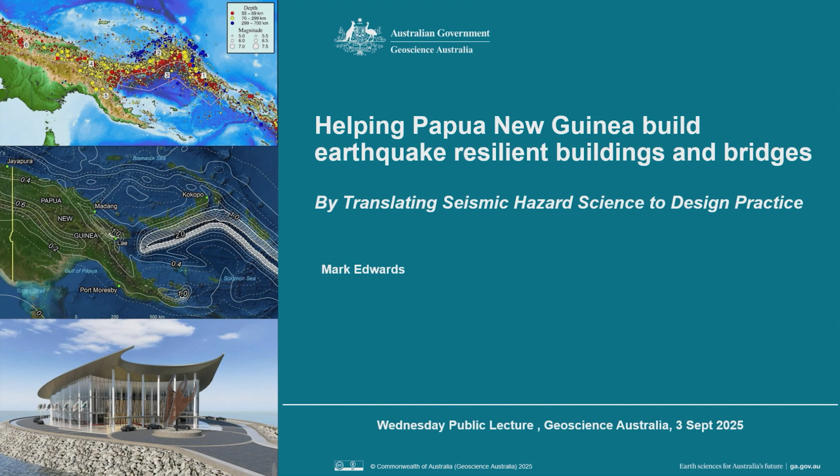Thank you very much, John, for the opportunity to speak today on a program that began in 2018 for our section, captured in the banner on the left-hand side, where we're translating observed earthquakes into a probabilistic understanding of the hazard, and then the last step is actually translating it into regulation for buildings and infrastructure.

When we reflect on the last 12 months, some significant earthquakes have occurred in our region. One, mentioned by John, is the earthquake that occurred in Vanuatu, which had a major impact on Port Vila. 14 people died, 265 injured, with damage to infrastructure and buildings. Some of those buildings were older - the bottom left shows an older structure that collapsed. But the top left is a more modern building which housed 4 diplomatic missions, and you can see that it actually collapsed.

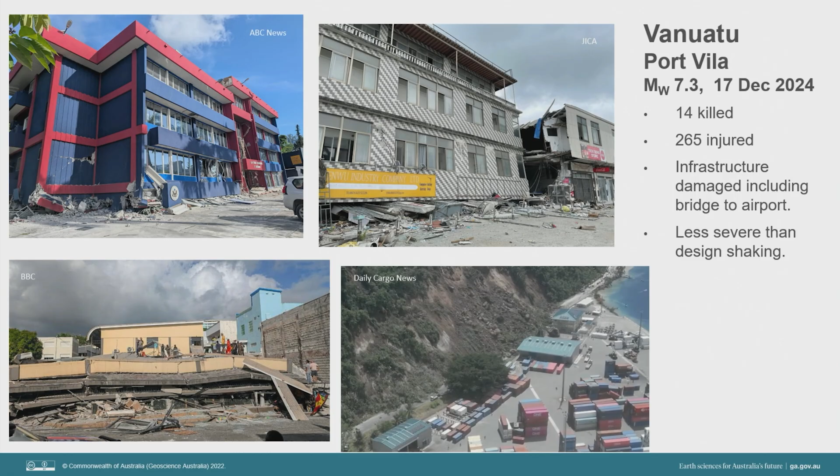Half the building had a soft story collapse, which directly impacted the US Embassy. When it comes to the level of shaking there, that was probably less than design level shaking to their current standard.

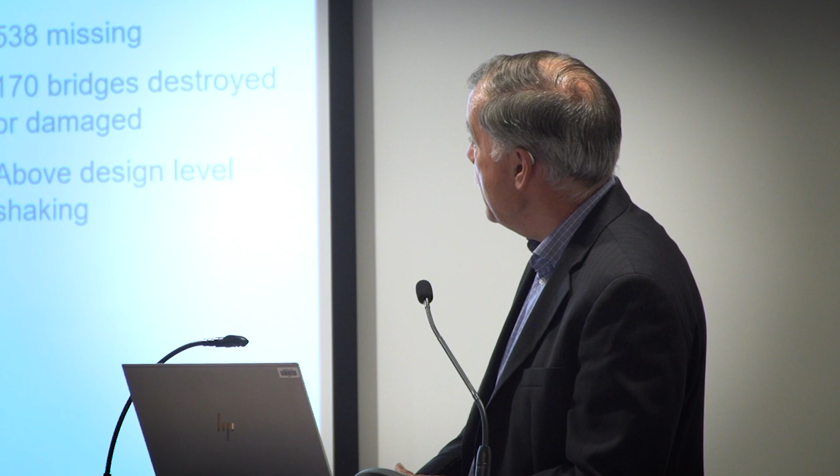More recently, Myanmar - this is the impact on Mandalay. Over 5,000 people killed in Myanmar, 103 killed in Thailand with the collapse of that building, 11,400 injured, and 170 bridges either damaged or destroyed.

In this instance, as best we could estimate, the shaking was above design level if they'd used the latest understanding of hazard in a modern code. When we look at the damage to the buildings, we notice some are quite modern. Looking at the bottom left, we see catastrophic collapse of apartment buildings. At this level of shaking, you would not expect that outcome - you don't want mass loss of life. Looking in the background, other buildings didn't catastrophically collapse like those in the foreground, indicating that not all buildings are created equal.

But it does raise questions when we look at those 2 events in our region. Was the hazard not well understood? Was it not incorporated into the building standards or manuals used for bridge design? What about the legislation - did it call up these standards? Were the building officials able to enforce them? What about the building professionals - were they competent when it comes to seismic design? And what about the tertiary institutions training the next generation of architects and engineers - do they have the resources to educate them?

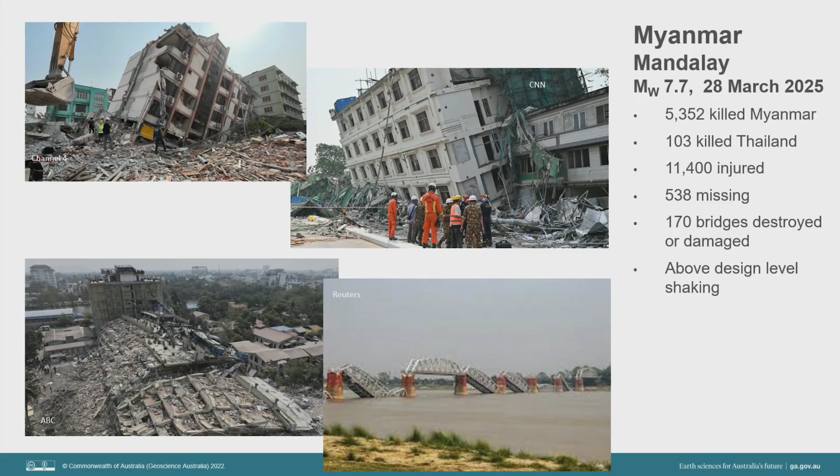In these areas, I'd like to describe a journey we've had in Papua New Guinea that has sought to address that. For those particular countries, it might be that 1 or 2 elements were missing - perhaps most of them were missing - but what we've endeavoured to do here is help them through all aspects of that.

So I'm going to begin by talking about the motivation - a new seismic hazard assessment - then looking at the implications for building regulation, assessing the adequacy of building regulation in light of the new hazard assessment, engaging with stakeholders to assess what they need, developing an interim amendment, and delivering new science to the professionals who will use it. Then, on the legislation side, helping the PNG government revise their legislation to mandate development of a new standard, and how that will be influenced by a new loading standard in New Zealand soon to be published.

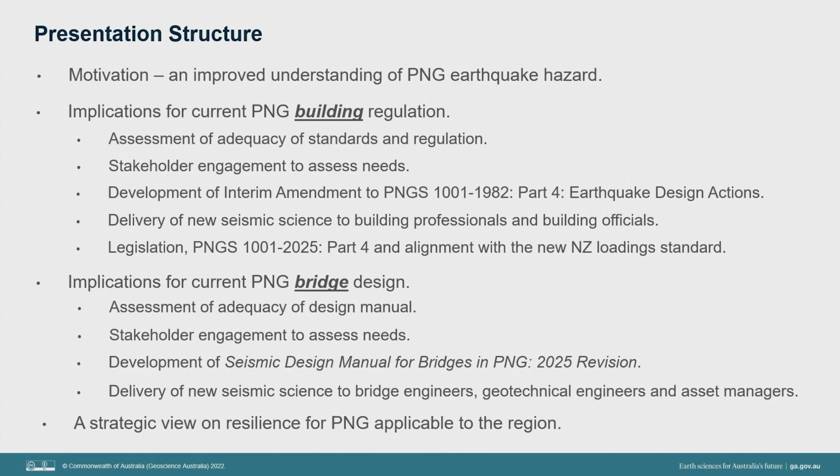Then moving on to bridges - again assessment of the adequacy of bridge design, engaging with stakeholders, developing a new updated manual, and delivering this new seismic science in a form usable by professionals: bridge engineers, geotechnical engineers, and asset managers. Finally, lifting this journey up to a more strategic level as to what it means for PNG when it comes to resilient infrastructure, and also for other nations in our region.

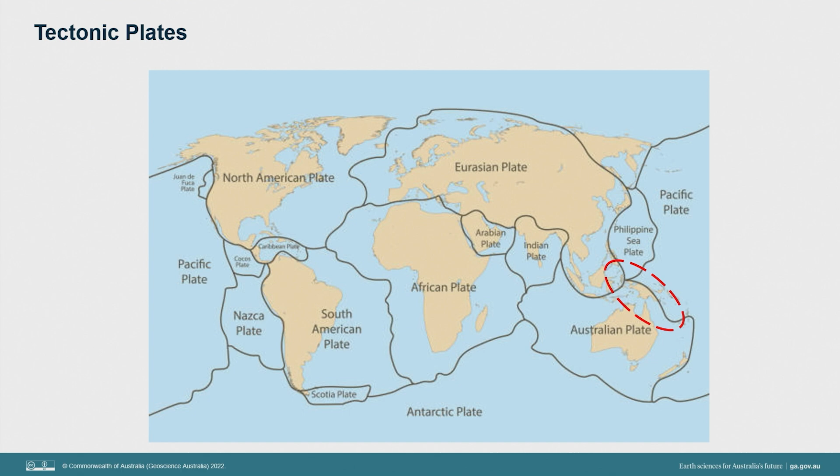So why do we have earthquakes in Papua New Guinea? Well, we all know about tectonic plates, the Earth's crust. These are the primary tectonic plates, and when we look at Papua New Guinea, it's astride the Pacific plate and the Australian plate.

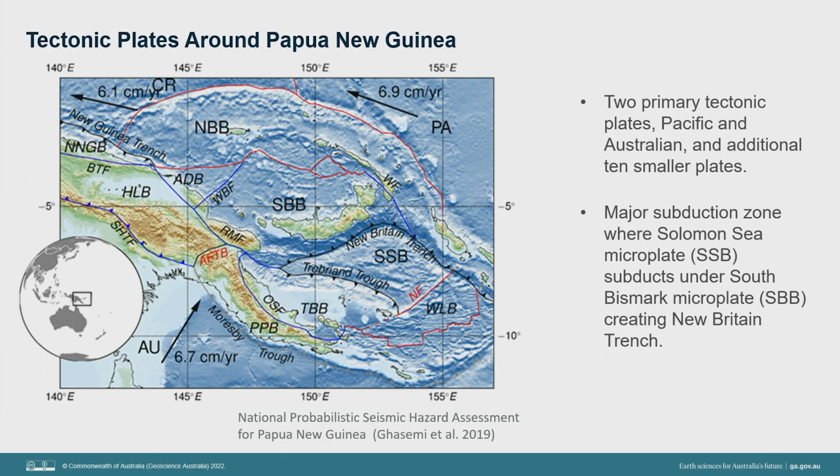But when we look at that plate boundary environment, it's much more complex than that. At the top right we've got the Pacific plate, bottom left the Australian plate. In that region between, there are 10 other plates and microplates being stressed by tectonic movement.

That tectonic movement we can see right here at Geoscience Australia with our GNSS stations, the tuned antenna we have. More recently we can actually observe tectonic movement every year. Looking at the movement observed in Karratha, Western Australia, moving on average at 70 millimetres per year, and here in Canberra, 58 millimetres per year.

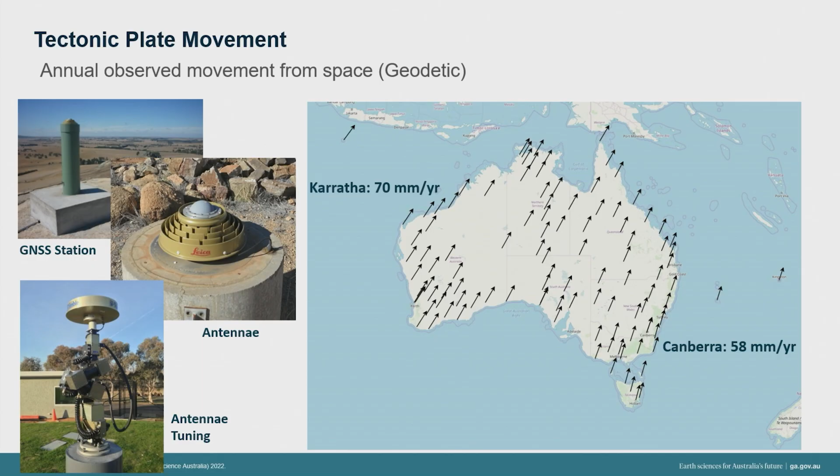But where we're moving into Papua New Guinea, we're into that rather complex plate boundary region, and that causes relative movement between all of these plates and microplates. This is work by Richard Stanaway, who has been doing geodetic work looking at the movement of monuments in PNG.

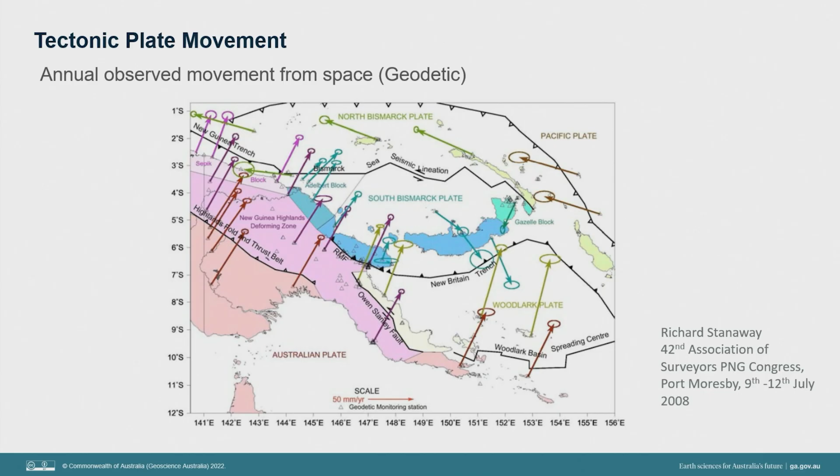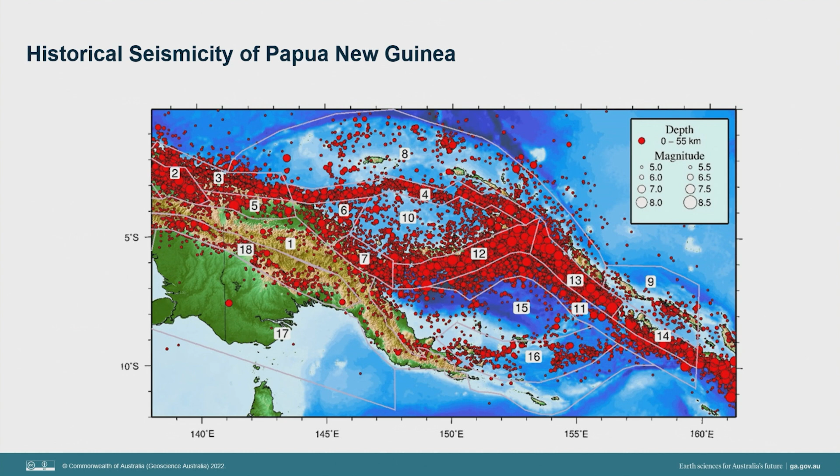Now this relative movement and the stressing that occurs in these plates generates earthquakes. This is the catalogue of earthquakes assembled by Hadi and Phil, some 40,000 events, and you can see where these earthquakes are occurring and how large they are, basically following the boundaries of these plates, as well as earthquakes occurring within the plates due to crustal stressing, giving us shallow active crustal earthquakes as well.

Now all of that has been rolled into a new assessment of bedrock hazard, another DFAT-funded collaboration between Geoscience Australia and the PNG government, the Port Moresby Geophysical Observatory. The initial assessment was published in 2016, then following peer review, published in 2019 as PSHA 19.

And what do we notice? Well, we notice that the bedrock hazard, expressed as the 10% chance of exceedance in 50 years, which is a very useful reference likelihood for building and infrastructure regulation, varies across the country. So we've got higher hazard around New Britain.

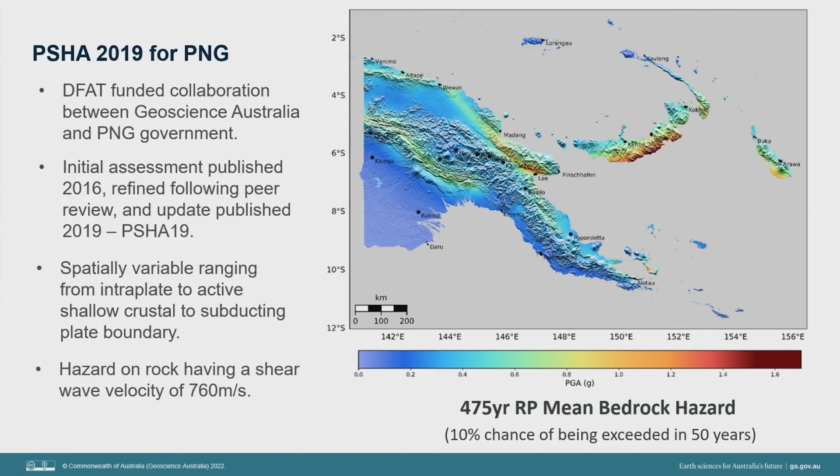We've got that major subduction zone taking place underneath New Britain. We can see the high hazard in Lae. We can also see the Southern Highlands thrust fault region.

Now what is of interest is to look at how seismically active Papua New Guinea is compared to other countries that we tend to associate with high hazard and risk. Well, here's a list of countries we associate with high hazard in these cities. Some of them have experienced major earthquakes, like San Francisco.

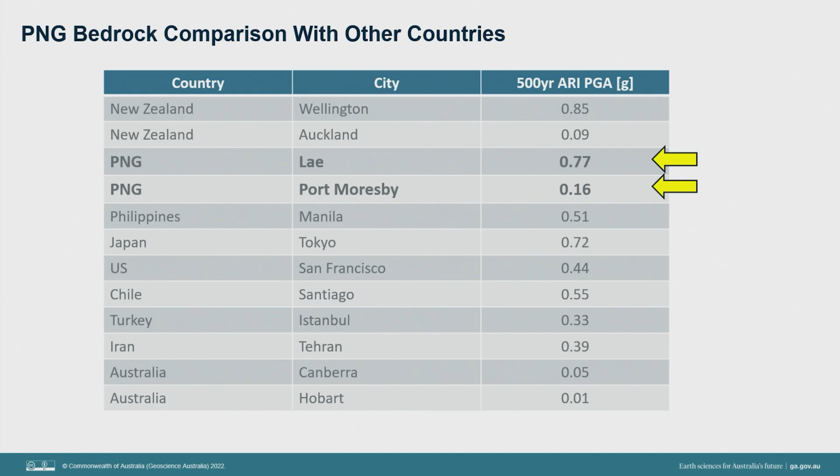Where does PNG sit? For Lae, based on PSHA 19, its bedrock hazard is 0.77 G, only exceeded by Wellington based on the latest probabilistic seismic hazard assessment done in New Zealand. But further work is being done since PSHA 19.

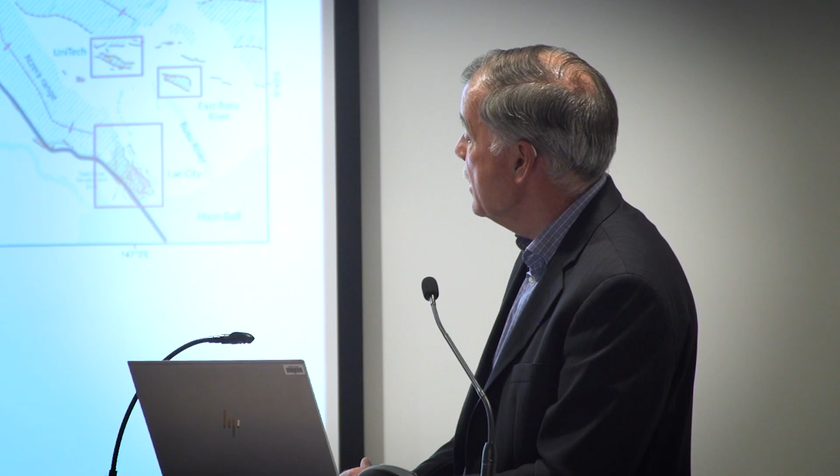So this is a study of the earthquake hazard and risk in Lae, the second largest city, with major implications for economic activity in the country—the major port, the largest port when it comes to throughput of economic activity.

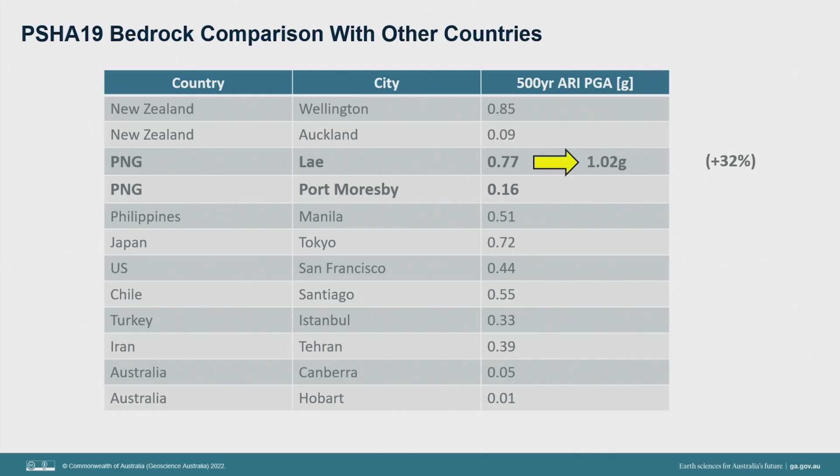Through further collaboration, a better understanding has been developed of the bedrock hazard under Lae, and now the assessment is as high as 1.02 G, 32% higher, taking it above Wellington. So we're dealing with a country that has high hazard, very high hazard, in parts of the country.

But when we think of the building regulations or manuals for infrastructure design, what are we trying to achieve? Well, we're trying to achieve a compatibility with the hazard, which is spatially variable and will be influenced by overlying soils, such that the vulnerability or resilience of that infrastructure will meet societal expectations, whether it comes to loss of life, which is a major focus, or amenity and less directly economic loss.

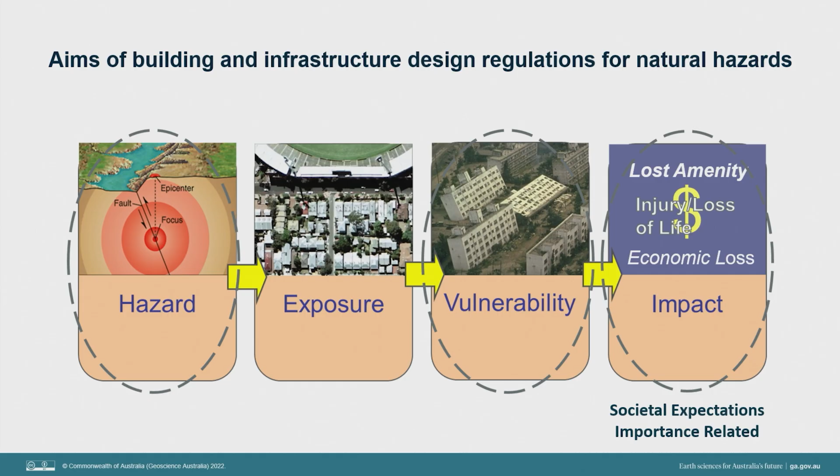Now just what is societally acceptable is based on the importance of the building. So if it's an agricultural shed, with very limited human exposure, the importance is lower. Whereas if it's a hospital with post-disaster function and operating theatres, critical care facilities, then the importance is much higher—we expect a higher level of performance.

So when we look at the building regulations in Papua New Guinea, these are the ones currently called up in the legislation, developed in the 1980s. This was an initiative funded by the Australian government. It includes earthquake as well as other environmental hazards such as wind, and at the time it was an adaptation of the standards we had here in Australia, but with the introduction of seismic design provisions.

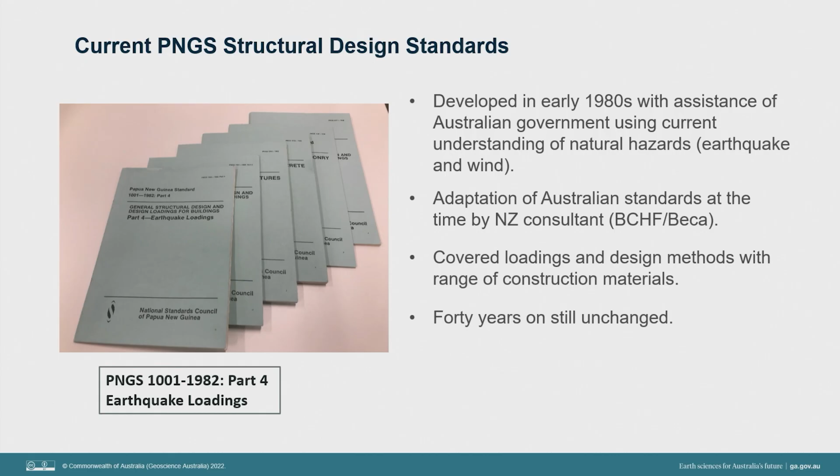That was done by consultant Beca Carter Hollings and Ferner, now Beca in New Zealand, and it covered a whole range of construction materials too. However, over 40 years on, it remains unchanged. So what we're focusing on today is Part 4, which is the earthquake loading standard.

How adequate is the present standard in meeting the societal expectations of infrastructure in PNG? Well, if we look at the standard, the actual hazard across the country in the current standard, and also the bridge standard, has the same zonation map, it's by zone. So we've got zone 1 being the highest, capturing a large part of New Britain, New Ireland, Bougainville.

As we come across the country, progressively zone 2, zone 3, zone 4 have lower and lower hazard for design. And if we compare that to the new understanding in PSHA 19, what do we notice? Well, we notice, for example, that the high hazard in the Lae region, the Huon Peninsula, is not reflected in the zonation map. So it's zone 2 rather than zone 1 for Lae.

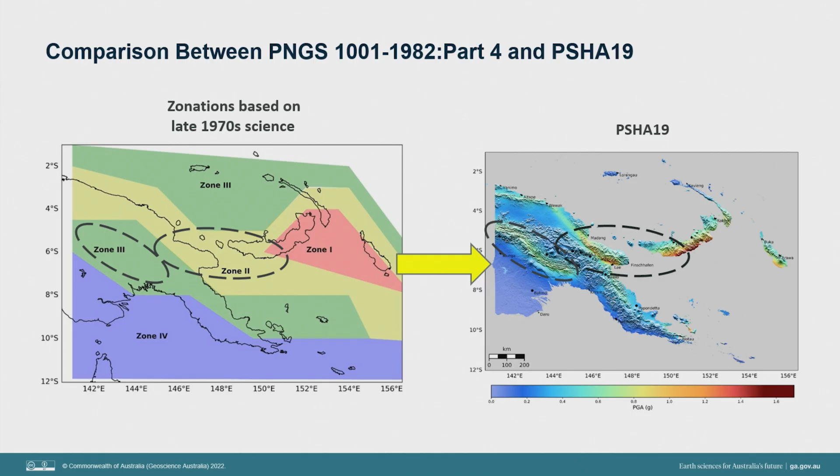We also have the Southern Highlands Thrust Fault region, where there was a major earthquake in February 2018 which killed 160 people, and then 40 people perished in the aftershocks. Well, that's not featured either, that's only zone 3. So we've got an issue spatially where we're defining where the hazard is high, but we also have an issue when it comes to the absolute value of design hazard.

Now, to help us consider that, what we did was have a look at the range of buildings built in Papua New Guinea. All of these buildings actually exist in Port Moresby, from short, stiff structures, say a short period of 0.2 seconds, progressively taller and longer periods until we get to the tallest building in the country. And what is a significant parameter for these when it comes to assessing adequacy is what we call the natural period of the first mode of vibration.

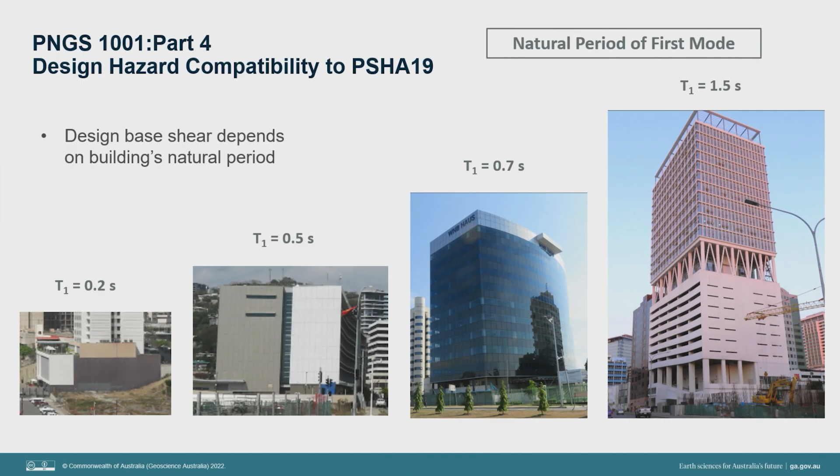So to explain what that is: if you could get hold of one of these buildings, pull it to one side and release it, that would be the time it would take to oscillate and come back to where we released it, with all floors moving in the same direction. That's the natural period of the first mode of vibration, T1, and that's been a key reference value for assessing the adequacy of the design.

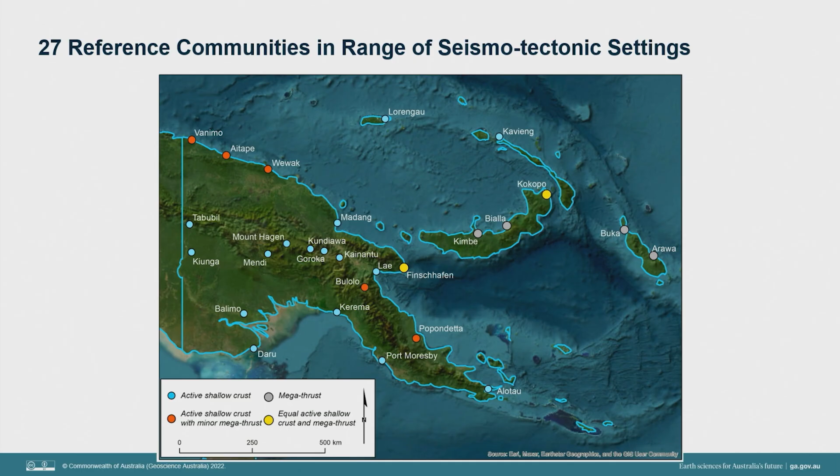To do that, we looked at a range of communities across the country and virtually placed these building types to see whether we would be under-designing or over-designing these buildings. Here is a summary of all those communities, 27 of them. Across the top there, we have the natural periods of those taller and taller buildings.

Orange indicates under-design by at least 10%. Blue indicates over-design by at least 50%, where what we're doing is over-investing in the seismic resilience of the building. And what do we notice? Well, first of all, we notice that typically shorter period buildings across the country are being under-designed.

Most buildings in PNG are of those natural periods. The taller buildings over here pretty much only exist in Port Moresby, and there's not a large number of them. And then when we look at the major cities of Lae and Port Moresby, what do we notice?

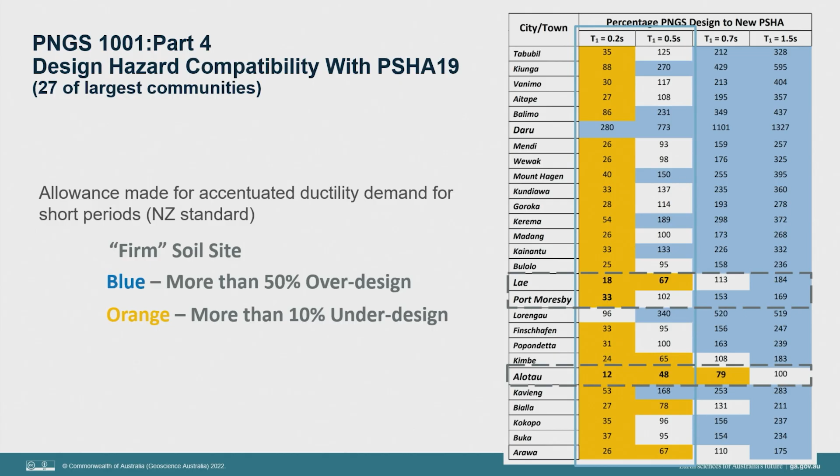Well, we notice that for Lae, we're under-designing a short period building by a factor of 5, and in Port Moresby it would be a factor of 3, and if we go down to Milne Bay Province, Alotau is a factor of 7.

So very significant under-design. With this review done, we actually took that back to the stakeholders. We had 2 workshops in Port Moresby to engage with a whole range of stakeholders that use or are influenced by the application of the building regulations, to determine what their needs are going forward.

So from that stakeholder engagement, there was a recognition that really all the standards needed updating, they were 40-plus years old. In updating them, what would be very good would be to keep Australasian consistency, so between Australia and New Zealand we have common structural design standards. The only area where they differ a little is when it comes to earthquake loading, so compatibility to Australasian design practice.

And then a 2-stage approach: the first stage to actually provide some interim guidance so that you avoid the under-design, and then as a second stage, a new suite of structural design standards for Papua New Guinea. The aim is not only to address the under-design, but also to move design practice closer to present practice in Australia and New Zealand, which represents best practice around the world because things have changed over a 40-year period.

So I'm going to look at 3 aspects of what we did to take that new hazard and introduce it into an interim amendment that could be used alongside the earthquake loading standard. The first thing was, how do we define the hazard across the country? Do we use zones? There was a keen interest from stakeholders, Department of Works, who managed the legislation, to do it with zones, because the legislation describes the hazard in zones, so we'd have to change the legislation if we packaged up the hazard in a different way.

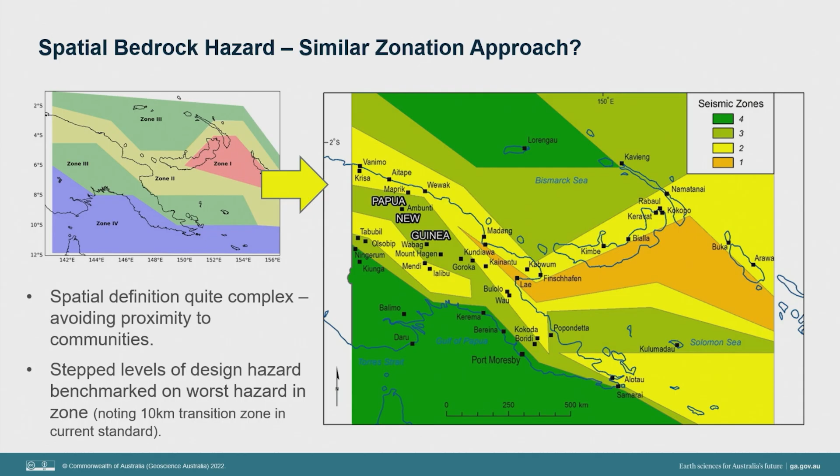The disadvantage of zones is that the hazard you define for the zone has to be the highest hazard in the whole zone, so it leads to over-design elsewhere in the zone.

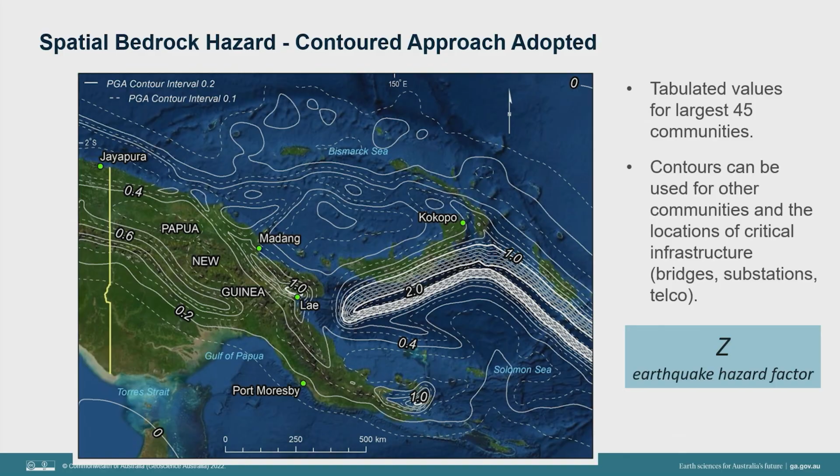We also wanted to look at how the earthquake hazard for design might be influenced by the seismotectonic setting. Huddy went through and categorised these 27 communities based on the nature of the earthquakes driving the hazard in each community.

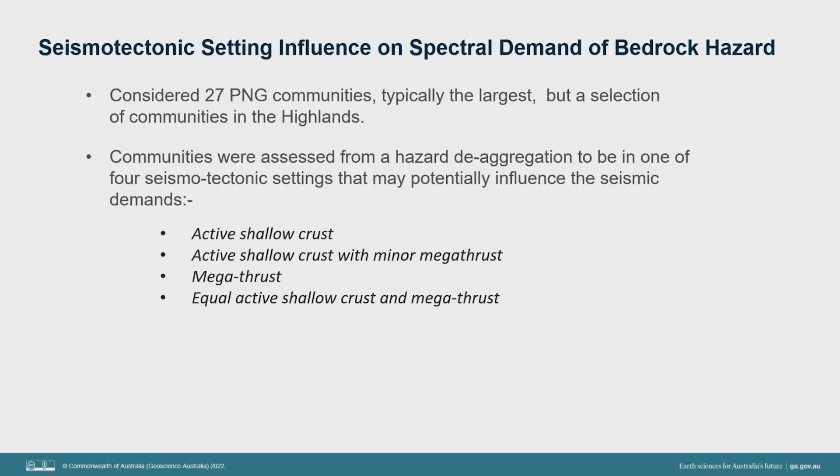If the earthquakes typically are local earthquakes contributing most to the hazard, there's higher frequency content in typical ground motions, which influences the demand for shorter structures versus longer period structures. Whereas megathrust earthquakes tend to have longer period, lower frequency components, which increases the demand for longer period structures. Or we could have communities which are combinations of the two.

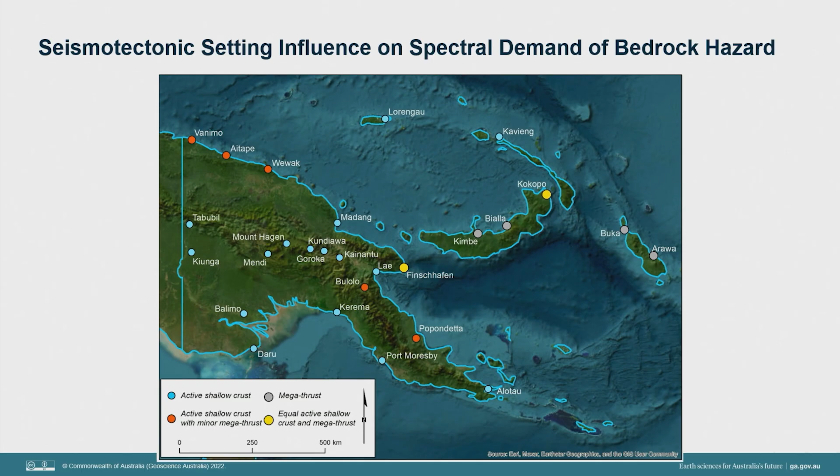So we had 4 categories, and here are those 27 communities again. An example would be Daru, coloured in blue in the bottom left, where the hazard is very much driven by local earthquakes. Whereas if we go to Kimbe, in New Britain, which is grey, that's very much dominated by subducting lithosphere underneath New Britain, giving that longer period content, and combinations between the two.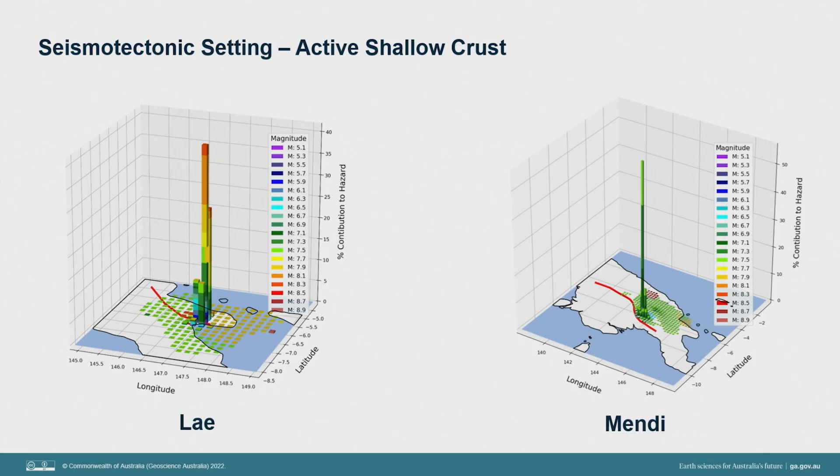Just to illustrate what we're looking at, there's Lae, for example. We've deaggregated the hazard and looked at where the earthquakes contributing to the hazard are located, as a percentage contribution to the bedrock hazard. For Lae, it's all very clustered around Lae, driven by the local fault systems there and active crustal earthquakes. Mendi in the Southern Highlands is very similar.

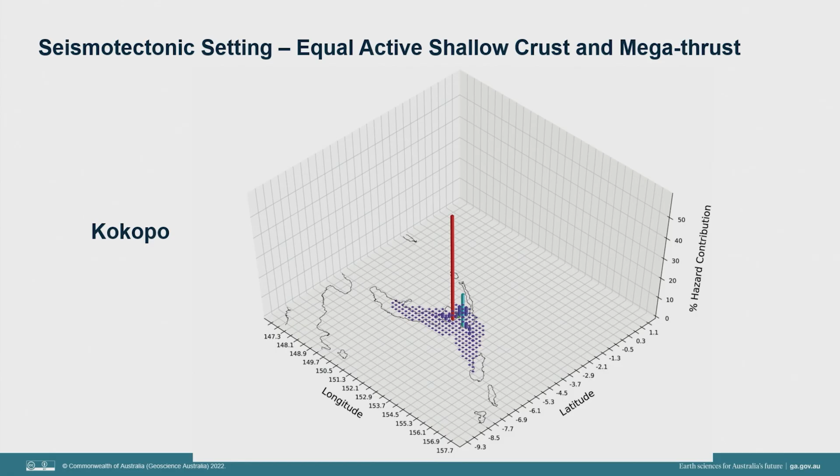Now, when we look at the demand associated with this, what you see here is the factor used for determining the loading, which is the spectral shape factor, along the y-axis. This is the spectral period, which we can think of as the period of the building, so taller buildings are more to the right. As expected, the demands are higher where we're looking at megathrust contributions to the ground motion.

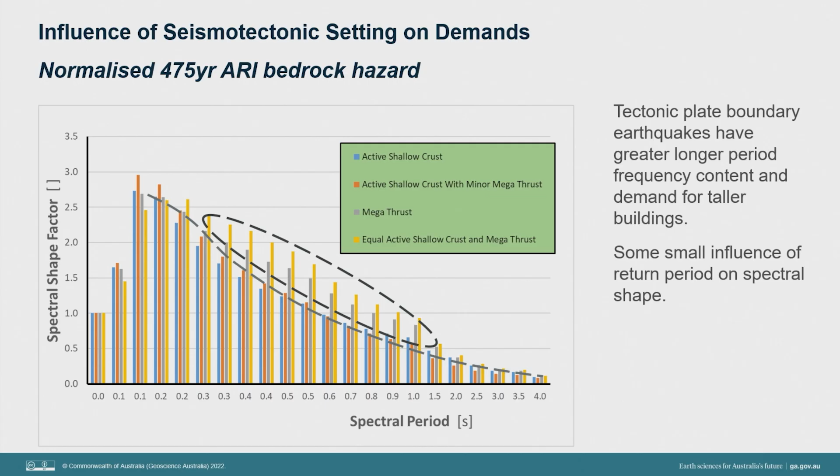So the question was, do we need to differentiate between the two across the country? What we found was that if we took the New Zealand spectral factors for a rock site, a Class AB rock site, it was a reasonably good envelope of those 27 communities and their spectral shape factors.

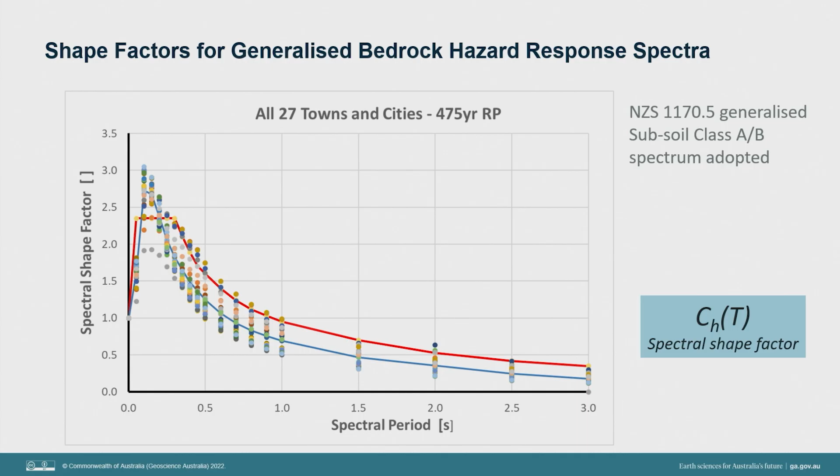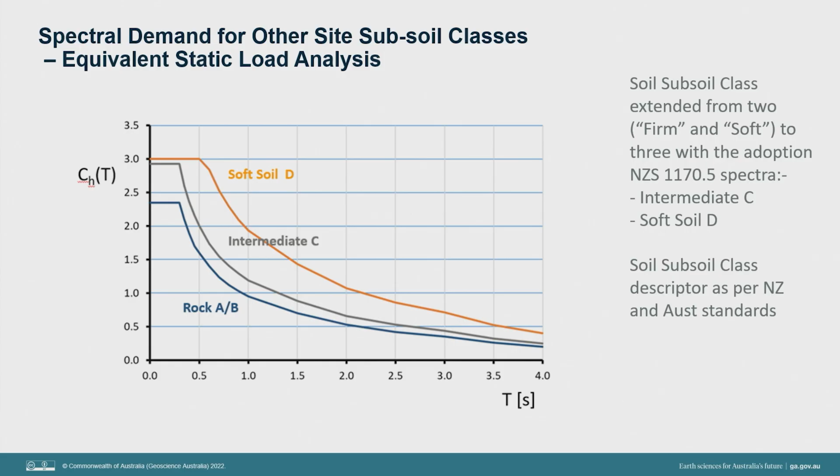We adopted that, and then we in turn adopted the spectral shapes for two other soil classes, intermediate and soft soil. So we were expanding the range of soil types from the present standard's soft and firm, now moving from rock to intermediate to soft soil, with guidance there if you're looking at even softer soil sites. So we're better targeting the hazard for design to the local hazard at the site.

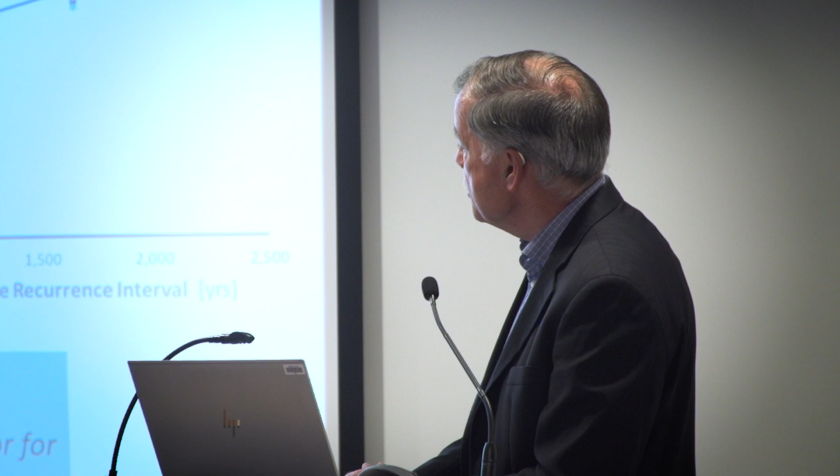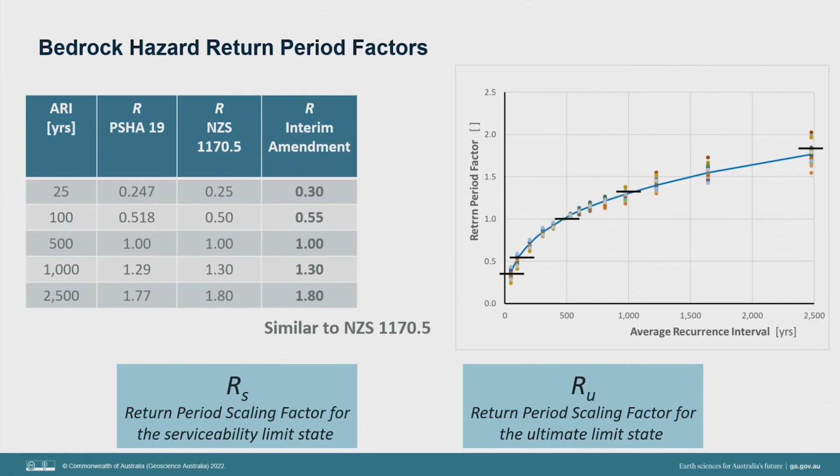And then the third thing, just to highlight how we've introduced this new seismological science into the building regulation, is to look at how the design level changes with the rarity of ground motion that would apply to different importance classes of buildings. What you see here on the right is basically a return period factor for all those 27 communities. We assessed the average for a range of return periods of interest for design, and found the loading factors for more important structures in the New Zealand standard ended up being very similar to what we got from PSHA 19. So we've adopted the PSHA 19 influence values, but they are very similar to New Zealand's. We might expect that because both countries are in a very similar seismotectonic setting.

This comes into play when we look at the importance of the building, which relates to the consequence of failure. If you've got, for example, a building with low consequence of failure and low risk to human life, that would be importance level 1. Most buildings sit at importance level 2, but a hospital with post-disaster function would become importance level 4, or a facility holding hazardous materials that you wouldn't want liberated to the public. Then there's even category 5 by special study, which might be something of a nuclear nature, where there are even greater consequences if damage was caused by an earthquake.

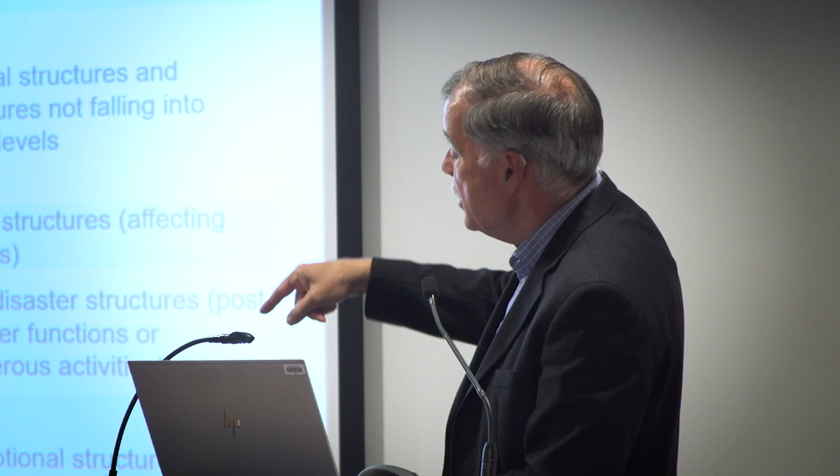Having identified the importance levels, and with the descriptions around those improved in the interim amendment compared to the current standard, this also tells the engineer how much to factor the loading up, whether designing for ultimate limit state or for a serviceability condition.

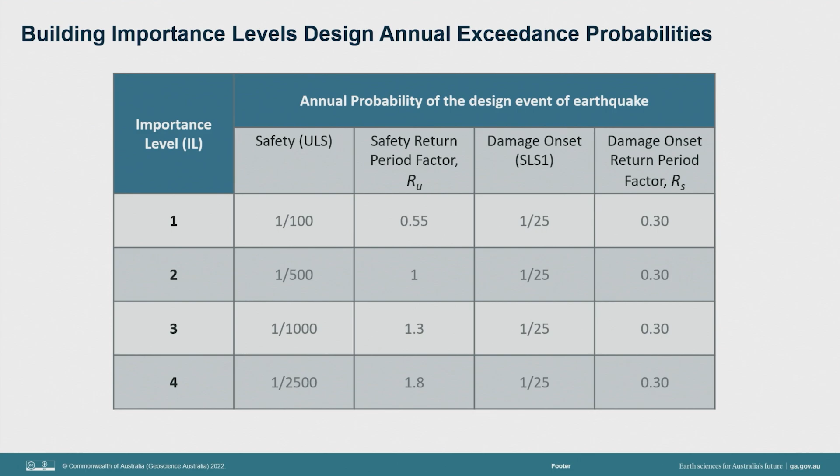The last thing we needed to include in the interim amendment was the recognition that the current standard was called up in the legislation. So the minimum requirement was the current standard, meaning you couldn't take advantage of avoiding over-design.

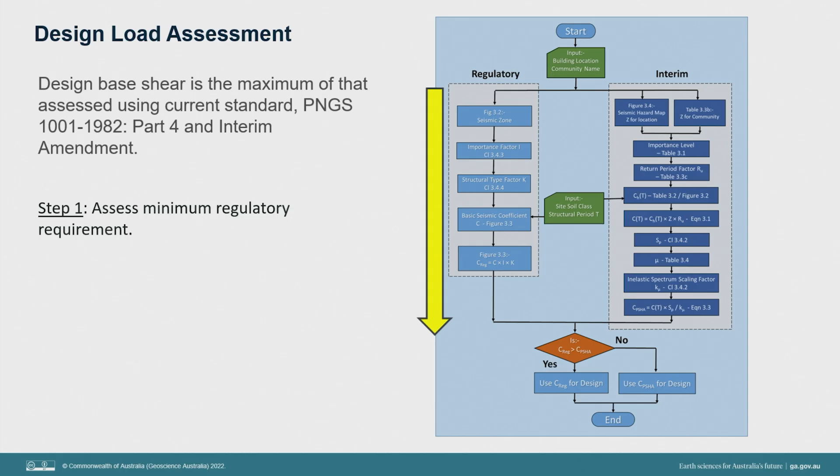This is the flow chart in the interim amendment, where what you need to do is assess what you'd have to design using the current standard, then compare that to the more refined, improved assessment of design load, and adopt the greatest of the two.

So the result has been this: the interim amendment. Here's a copy of it right here. It was released by the Minister of Public Works and Highways, the Honourable Solan Mirisim, in July 2023.

Because we did a video capture of the seminars, we were able to bring all that content back, and our media team translated it into 13 professional development lectures for training those who missed out, and also as a resource for the university. These have been provided back to the stakeholders in PNG.

But we had some complications. Going back to those seminars, some people missed out, so there was a request to run the seminar for structural engineers again, which we did in April the following year. What became apparent was that in almost a year, the interim amendment was not being used very much. The reason being that for clients building a building, if it required more investment, they'd rather just stick with what they had to do rather than what ideally they should do. The problem was that while the interim amendment was a resource, it was not mandated—there was a choice, and that was the choice being exercised.

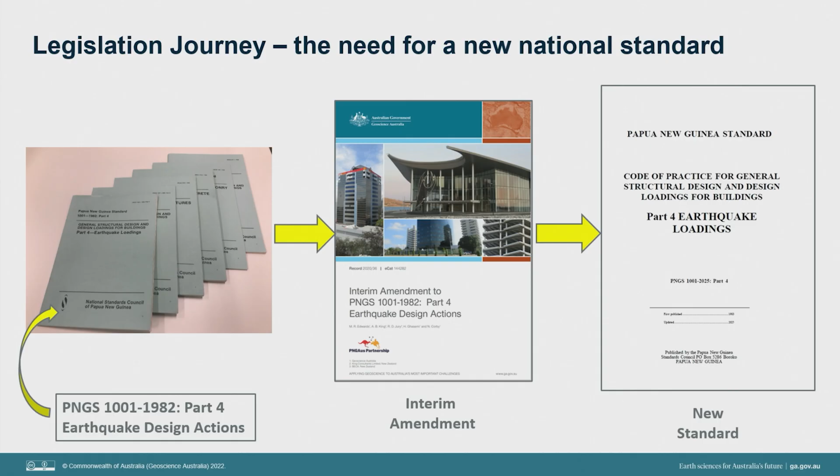So in discussion with the stakeholders, and particularly DFAT, we got additional funding because we saw the need to actually develop a new standard for PNG that could be called up in the legislation. The journey has been from the current standard, to the interim amendment, and then rolling those provisions into a new standard, which has just been reviewed by their technical review committee.

There's another complication that's come up most recently: the New Zealanders are changing their loading standards. The New Zealand standard was a strong influence on the changes made in the interim amendment and the new standard for PNG, and they're removing a provision called the equal energy principle.

Now, I won't go into all the details of what that is, but the implications of removing that is it reduces the design loading that you need to design for, because with the equal energy principle, what it does is it increases the design load that you need for shorter, stiffer structures, because the benefits of ductility are not as effective in reducing the design loads for the structure.

So to illustrate how much difference it makes, if we're looking at a building with 0.7 second natural period, so that's sort of like your 6 or 8 story building, and you go to shorter and stiffer structures, the design load goes up by, say, 75% for a 0.3 second structure, which is the more common structure in PNG. So there's quite an impost there.

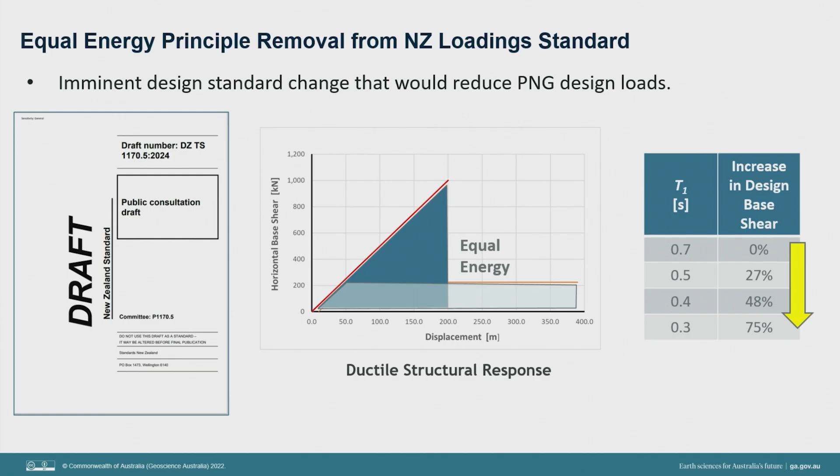So knowing that the New Zealanders are about to remove it, we discussed that with the stakeholders and agreed that we would further amend the 2025 standard and remove that. So while PNG is having to design for higher hazard overall, they're not having this impost on design, which is now being removed. So let's just summarise the journey.

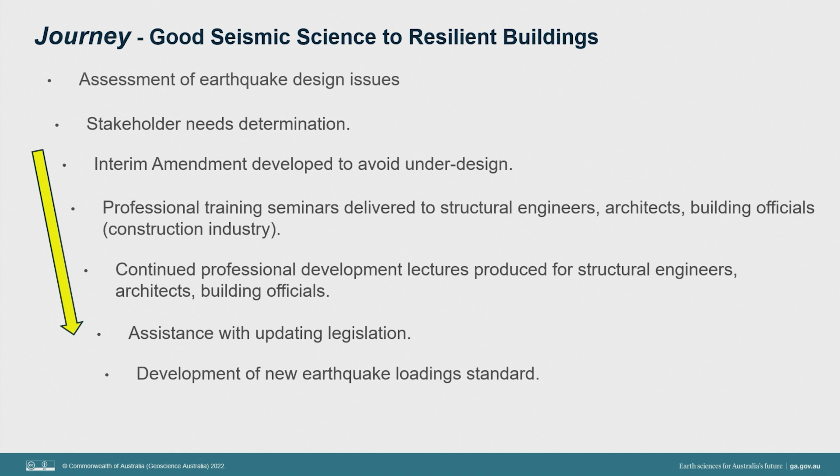What did we do? Well, we assessed the earthquake design issues. We engaged with the stakeholders as to their needs. The interim amendment was developed to avoid under-design. We delivered professional development seminars to engineers, architects and building officials in country. From those, we developed a suite of video lectures for continued professional development training. We've assisted with the updating of legislation and developed a new earthquake loading standard.

And looking ahead, the journey continues. The new standard is about to be published, so in fact it may well be published this month. The legislation needs to be enacted, and there's a little bit more we need to do for the Department of Works for them to finalise that. We're waiting on them at the moment.

The new standard will be subsequently amended to reflect where the New Zealand standard is going. So that's out for public comment. It's not the standard that's called up in their building regulations, but will be. So we're anticipating that. We'll translate the interim amendment into a manual to guide use of the new standard.

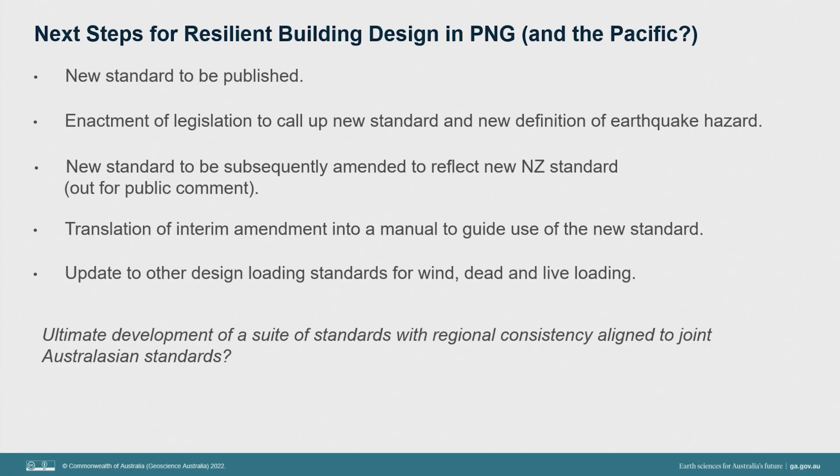And looking ahead further, what the Department of Works have indicated is that they would like new standards for the other loadings, so the environmental hazard of wind and also for dead and live loading. And then ultimately, with a Pacific focus, what would be a great development of this work is to develop regionally consistent standards that can be used in any of our Pacific Island nations by introducing the hazard relevant to them, and also taking into account any local variance when it comes to the nature of their building stock.

But what about bridges? Well, not long after the publishing of the standards in 1982, in 1985 a bridge manual was developed, and that involved Beca, Carter, Hollings and Ferner at the time. It wasn't a standard, it was a manual, and it was more than what was in a loading standard. Yes, it included earthquake loadings, but it also had provisions on structural design of elements. It had very extensive geotechnical guidance for investigation and design.

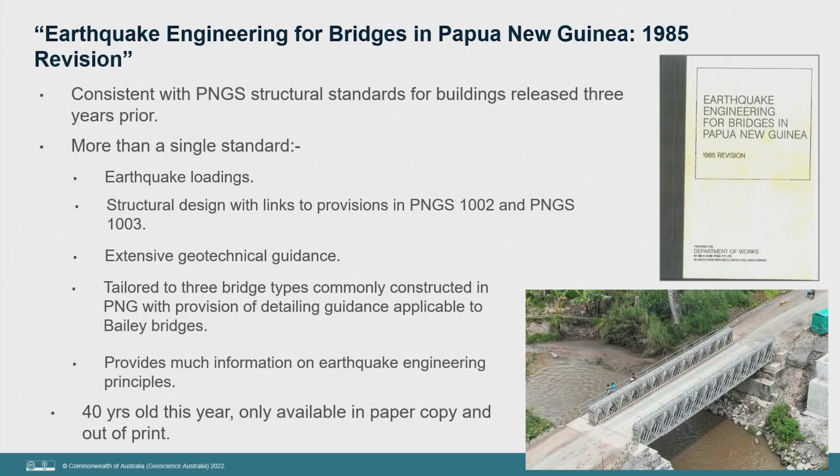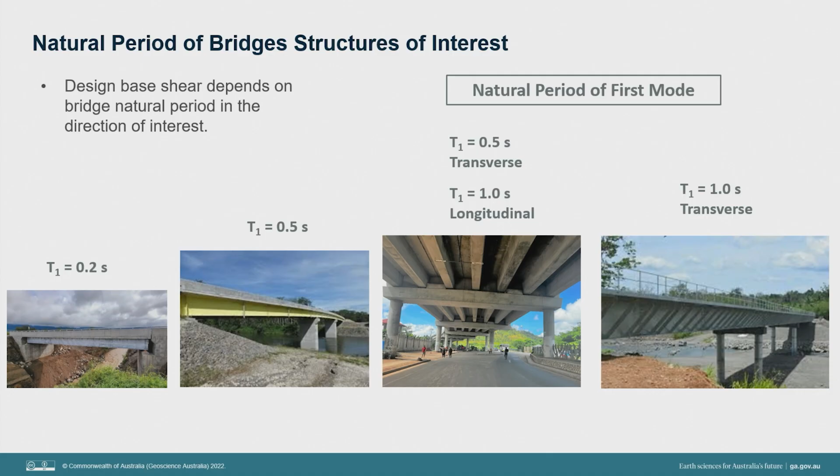But it's 40 years old this year, and only available in paper copy and out of print. So that really needed attention too. And so what we did was a similar exercise as we did with buildings. We looked at the range of bridges built in PNG, their natural periods. We looked at the same communities, but with these different periods of interest. And yes, we found the same problem.

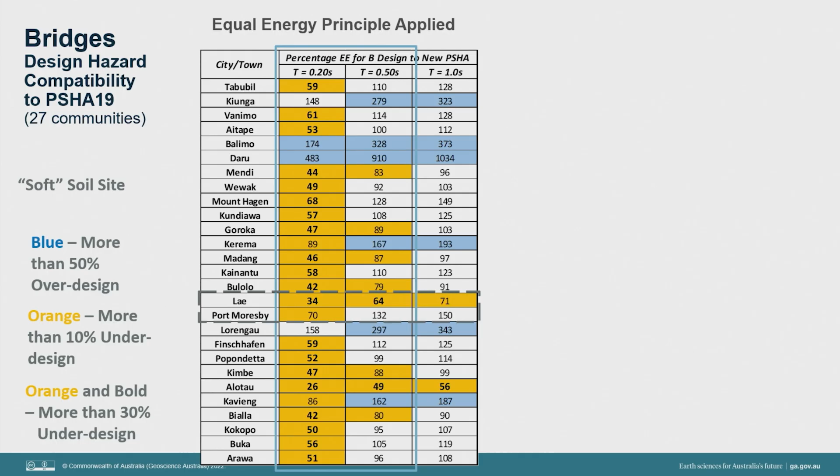We found under design. So if we're looking at, for example, Lae and Port Moresby, for a shorter, stiffer bridge, you're looking at an under design by a factor of 3, and Port Moresby would be under design by about 30%. So in a similar way, we took that to the stakeholders, now a much smaller group because we're dealing with no architects at these workshops, and got their view as to what they needed given what we've learnt about the adequacy of design in the country.

So we had 2 workshops there, and what we got from that was that they wanted to still continue to use the Australian bridge standard, AS 5100. They wanted to use that for all aspects of bridge design but earthquake design. So they wanted their manual updated for that purpose. They wanted alignment as best possible with Australasian practice in Australia and New Zealand. Some things were a lighter touch, other things had a major revision.

There was agreement on certain key design parameters, such as bridge design life, for example. So here in Australia, we design for a bridge design life of 100 years. In New Zealand, it's 50 years. 50 years was adopted for PNG.

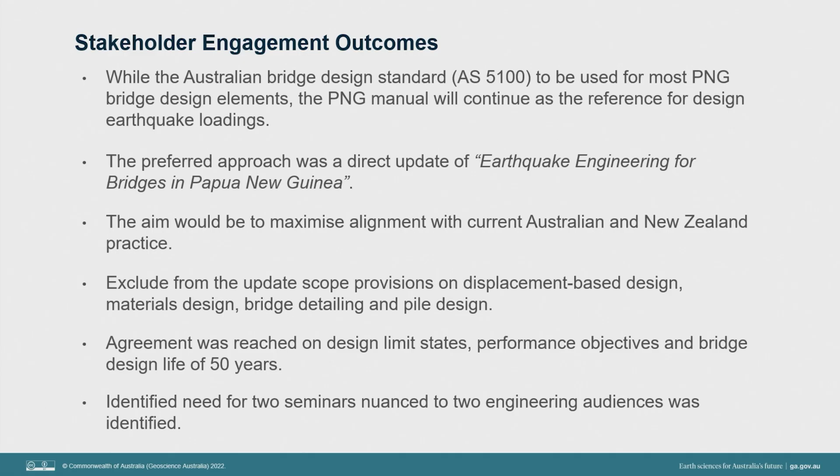And they also identified the need for two tailored seminars, one to bridge engineers and geotechnical engineers involved with the design of bridges, and they also saw the need for a more tailored seminar for provincial engineers in the 22 provinces that manage the assets, that have a role after an earthquake in terms of assessing whether bridges can be used after an earthquake. So that led to some seminars that I'll tell you about in a moment.

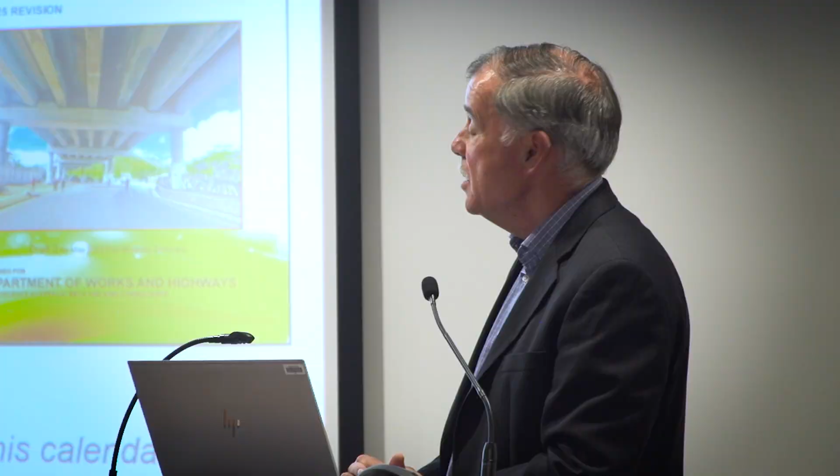So this has been the result. This was the version of the bridge manual that was used at the seminars, the draft 2. Same structure as the original manual, refresh of figures and photographs. The new hazard was incorporated using the design methodology in the Transit New Zealand manuals. The structural provisions were updated, but there was a very extensive revision of the geotechnical. And again, more than hazard, it actually moved design practice closer to Australasian practice.

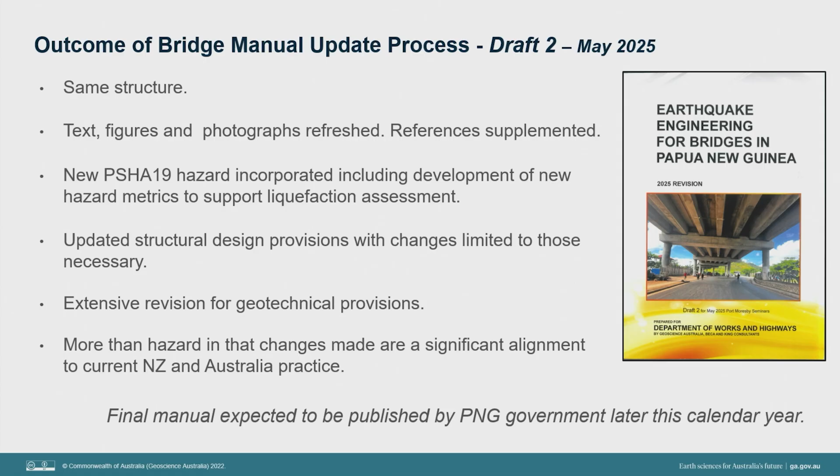And the manual now is being reviewed internally, so we would expect that to be available for the PNG government to publish probably in a couple of months' time. So there's been a lot of work doing that. But there was some additional work that was done from the hazard side, and that's to deal with the third bullet point there. There were other hazard metrics required to support liquefaction assessment. And so what we needed to do was to provide the mean magnitude for the hazard at that location and for a return period.

Now, interestingly, we had the opportunity of linking the geotechnical liquefaction assessment provisions in the bridge manual to the building standard, because we were working on both of those, so we were able to cross-reference this information in the new standard, which is new because the New Zealand standard doesn't actually cross-reference it. But we're able to do it because if you're designing a building, you have equal issues with foundations and liquefaction beneath buildings, and so this is a resource also for building design.

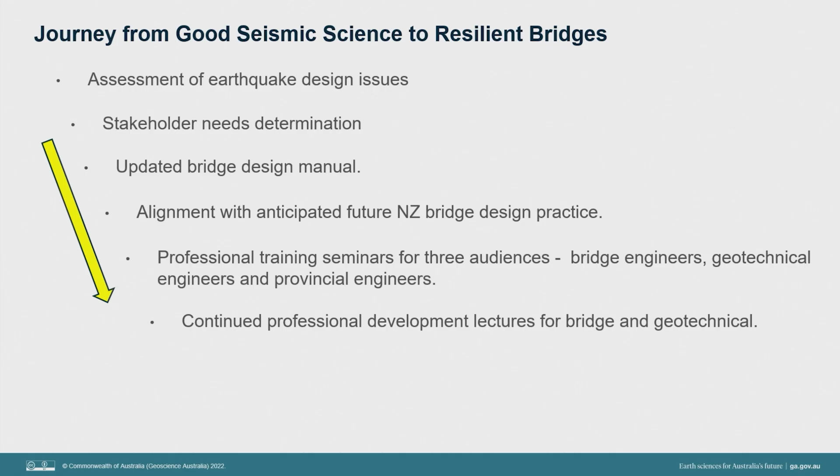For bridge design in New Zealand, the Transit New Zealand manuals have the equal energy provision, that impost, in them. In consulting with the engineers in New Zealand, they were very sure that in due course, once the building design standard removed it, Transit New Zealand would remove it from the bridge manual. So we've anticipated that change. In that sense, the bridge manual is ahead of the Transit New Zealand design manuals. We've provided professional training seminars to bridge engineers, geotechnical engineers, provincial engineers, and these lectures have been developed and will be shared back to the stakeholders in PNG.

But let's lift up the discussion to a more strategic view of the importance of resilience in our infrastructure. Now, in the introduction or preamble to the new manual, the Secretary of the Department of Works, Gibson Holemba, made the following statement. He said that this revised manual marks a transformative step forward in engineering resilience and safety for Papua New Guinea's transport infrastructure. May it serve as a practical and reliable guide as we continue to build a safer, stronger, and more connected Papua New Guinea.

And at the end of the second seminar that we ran on bridge design, he provided a concluding address on the significance of the work. And what I'd like to do is play that for you, and we'll just identify some key things that he said.

The revised earthquake engineering guidelines and specifications we have worked on will now guide our bridge designs to better reflect our local seismic conditions, terrain and geotechnical realities. These standards will also align PNG with global best practice while retaining our national context and our environmental challenges.

The initiative directly supports our national development goals under the Vision 2050, our National Transport Strategy Plan, our Connect PNG investment program that the government is supporting. And so, because resilient infrastructure is not an option, it's a cornerstone of sustainable and inclusive development.

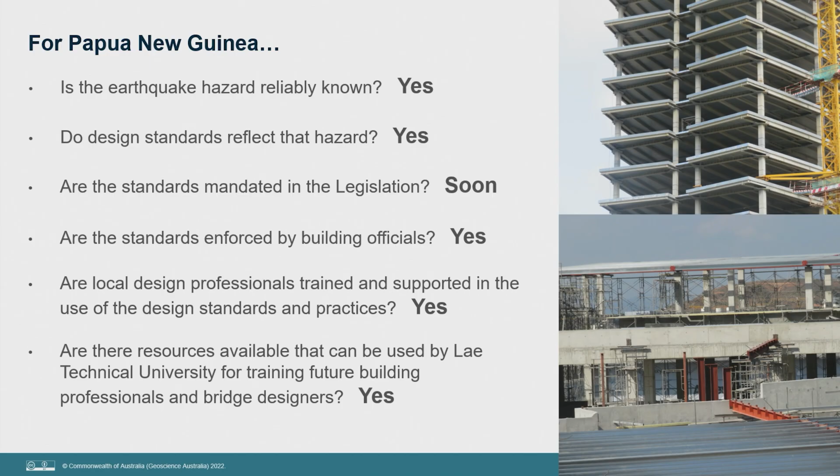Yes, they are. Are local design professionals trained and supported in the use of these design standards and practices? Yes, they are. And are there resources available that can be used by the university in PNG that trains architects and engineers, which is Lae Technical University, in training the next generation of building professionals? Well, yes, there are those resources available.

So in summary, the seismic hazard of PNG has been reassessed by a project led by Geoscience Australia with the PNG government. It's shown that the hazard across PNG is high, as you'll find in any plate boundary country. In comparing that new understanding of the hazard to the standards for building design and the manuals for bridge design, it's shown that typically buildings and bridges are being under-designed.

PNG stakeholders have identified their needs, a new building standard and an update to their bridge design manual. These have been delivered, they've been launched. Professional development seminars have been presented, and 36 professional development video lectures have been developed from that with 6 different professional audiences.

And looking ahead, future work is in producing commentaries, first of all, to translate the interim amendment to a guide for the new standard, because strictly the interim amendment is looking at the situation where the current standard is in force. So they're not aligned. So there's a piece of work that we've identified there.

Also, addressing a broader range of infrastructure types, and then an update to other building standards that deal with wind loading. So that's the other key environmental hazard. And if you update the standard for building design, it actually carries over into other infrastructure types. So an update to the wind loading standard for buildings would inform the design of transmission lines and communication towers and the like.

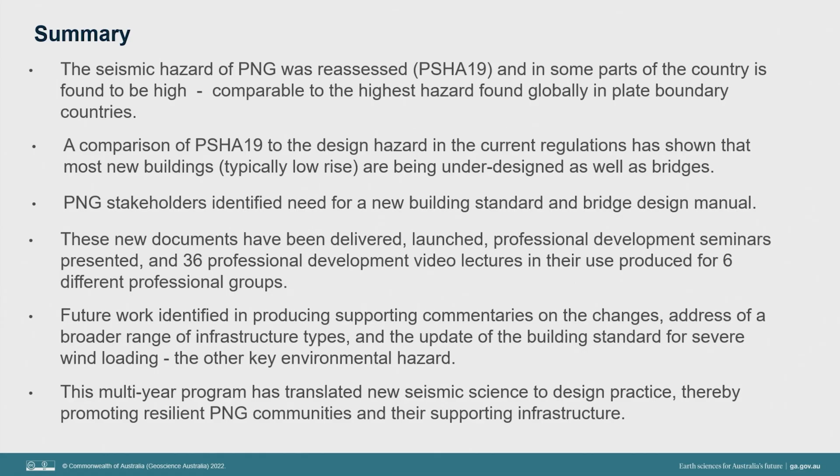And then a final comment is that this multi-year program has translated new seismic science to design practice, thereby promoting resilient PNG communities and their supporting infrastructure.